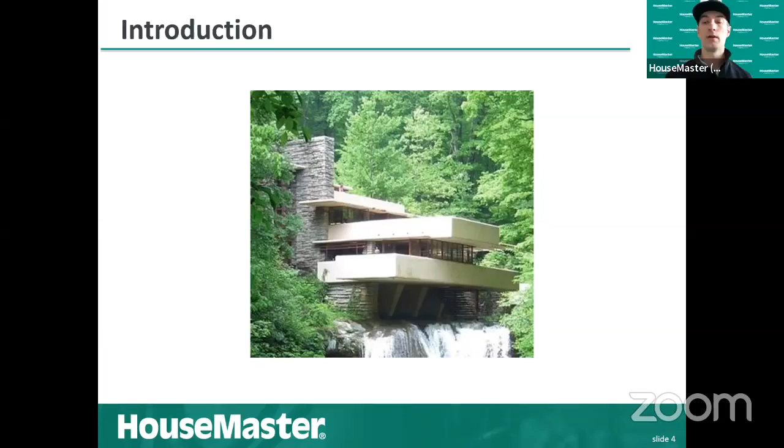So here we have maybe something more traditional that we're all seeing. This is the base of the foundation. You can see that the cracking is rather pronounced. Now, the question becomes, is this topical? Is this structural? From the outside, that looks bad. It's definitely something that is going to require additional investigation as we enter the home or walk around the rest of the outside to see how deep it is, to see if we can see through those cracks from the inside to the out. But regardless, if this is becoming structural or not, this is something that's going to have to be repaired.

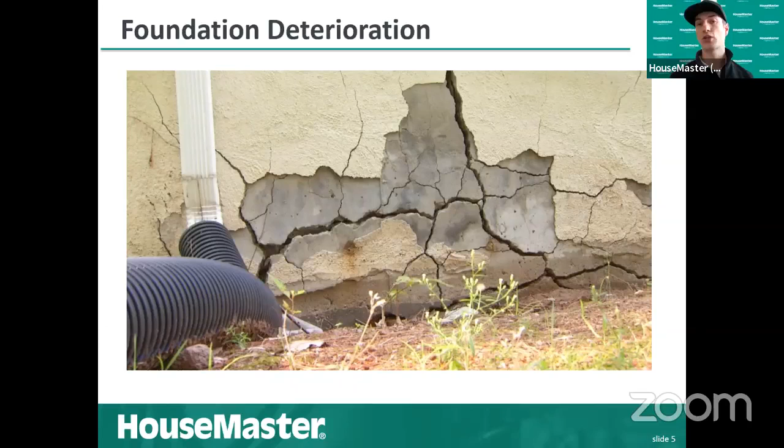The concern here is, is this affecting the structural integrity of that concrete wall? Now, on the flip side, this is something more common, something you'll see more frequently. You'll see that topical flaking of the foundation coating on the concrete foundation wall, or maybe even the block wall, depending on what you have.

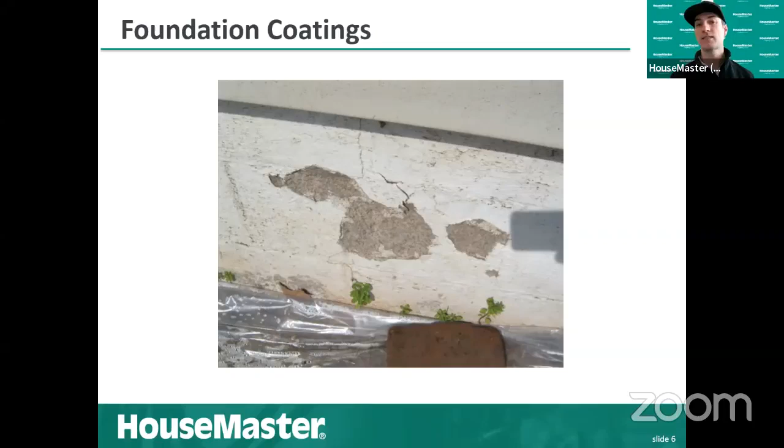Now, this is nothing to worry about, or only slightly some concern there. That flaking parging that's on the front of that wall does have some protection from water ingress, and replacing that foundation coating is a good idea. But at this level, when it's that kind of flaking, that's not something to be concerned about from a structural point of view.

Here we have a vertical crack. There's a few things we look at when we're looking at a crack. Is it vertical? Is it horizontal? Is it diagonal? How big is the crack? And is there movement? Is it just separating straight across, or does it have some kind of rotation or a lip on it? This is a rather large crack. I think it's probably anywhere from a 1/4 inch to a 1/2 inch, probably more than a 1/4 inch.

Cracks at the corner are common because that's often where there's a downspout or where water collects, and that can lead to differential settlement of the foundation leading to that crack. It is definitely something we're going to want to look at a little closer, and you're going to want to correct the grading at a minimum to make sure that it doesn't continue. First and foremost, this could produce water ingress on the interior of the home. It could also lead to further cracking.

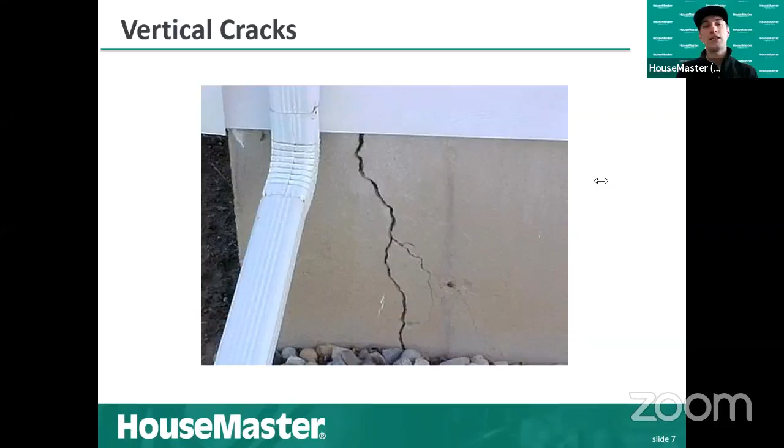It looks like there's probably some kind of aluminum, wood or vinyl siding above it, but it could lead to cracking in a brick facade wall. And if water continued to collect in that corner, maybe that downspout had been disconnected, maybe the grounds are naturally funneling water towards that corner, it could lead to continued settlement. In other words, continued sinking of that footing that could lead to structural issues.

So here we come inside to the foundation, and we see another crack. This one's diagonal. It's smaller, but you can see that this is leading to water ingress in the home. If you can't see actual water coming in, you can definitely see the remains of what the water brought with it. In other words, dirt.

This particular one was sealed, and we do look to see how it was sealed while we're there. While we can't always confirm the methods that were used, we look for certain styles of filling the crack. Is it done with just caulking? Is it done with injection crack fill? Nothing is 100% guaranteed, but there are certain methods that are better than others. But at a minimum, if this wasn't filled, you would want to make sure that it was, to make sure that you keep the water out of your basement.

The other issues are, if there is water coming in, that water can push against the wall, and particularly in a cold climate like Canada, that water that's behind the wall in the earth can freeze and expand, and that can push the wall. So again, a lot of these things are showing their symptoms in the foundation wall; that's what the cracks are. They're like a symptom of a larger problem. We want to take care of that larger problem. We want to get that water to be flowing out into the yard, not towards the foundation.

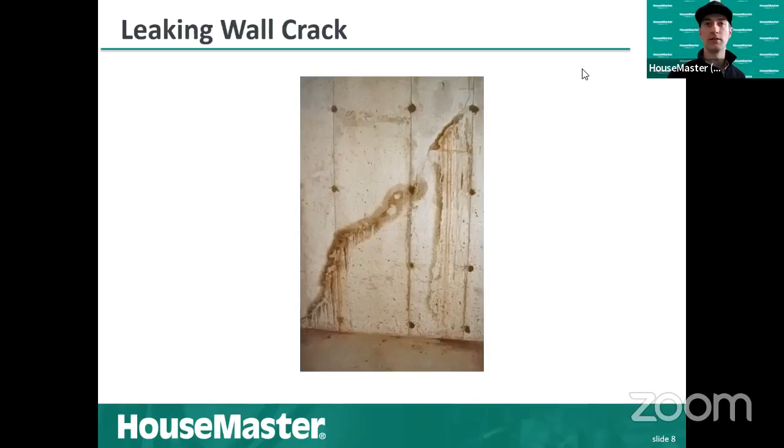So here we have some cracking in some block work. This is something that I would refer to a foundation specialist and possibly even an engineer. And the reason I say that is, while it is common, there's a couple of things that are going on. Not only do you see the cracking, which is an indication of differential settlement. In other words, one area sunk or raised at a different level than the other part, but you can see there's a little lip on it. And that means that part of the foundation has pushed in, where the other part of the foundation has not. It has stayed in place.

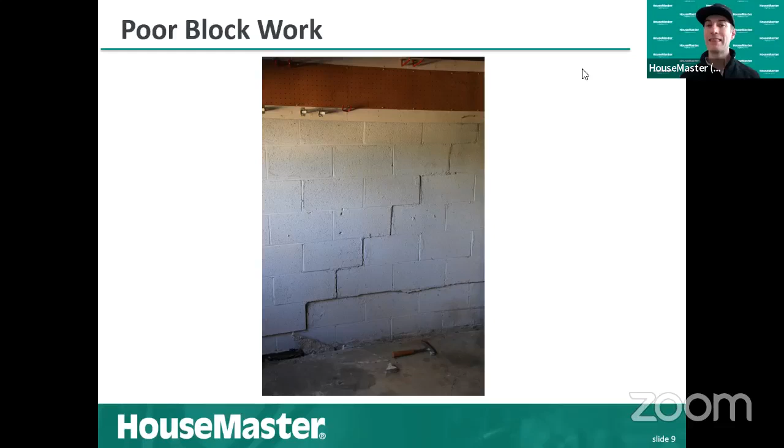That kind of difference is a larger issue than just normal, say, shrinkage cracking as concrete cures. This means that there is foundation movement. This means that the soil on the outside, or possibly heaving from frozen ice, is pushing that wall. And that's something that is structural in nature and could impact the rest of the overall structure. In this case, it seems very much in line with either hydrostatic water-based movement or ice, because you can kind of see there at the bottom that part of the bottom has moved and the other has not. And that is more of an indication of where the frost line is.

So here is a horizontal crack. When you have excessive lateral pressure, in other words, excessive sideways movement, it will result in a horizontal crack. Horizontal cracks are known to be the more concerning of cracks that we find in foundations, because it is an indication of foundation movement, usually from soil pressures or hydrostatic pressure. When I say hydrostatic, I mean water pressure.

It is structural in nature, and the foundation is what is holding up the structure above. So the wood framing that is above the basement that holds up the walls and the floors and the roof of your home is resting on the foundation. If that foundation gets pushed so much and it buckles and falls and collapses, that is going to impact the rest of the home. And so this is something that is serious. It's something that needs to get taken care of. This is definitely something that needs to be looked at by an engineer.

There are ways of correcting this. You want to start on the outside with whatever is forcing this to happen. Usually grading, downspouts, maybe there's a hill, something is forcing water or some other thing to push on that and create that issue. And then it's maybe not necessarily rebuilding the wall, but there's different methods, different materials.

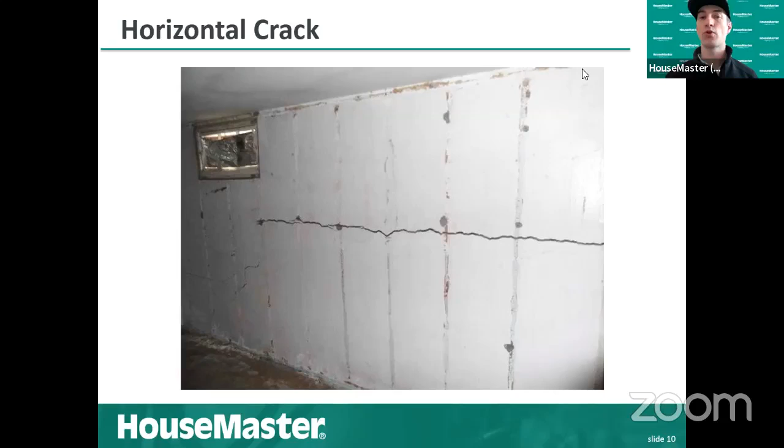You could put in pilasters. You could put in certain, almost like strapping, and they put posts out underground, and then they screw it back to kind of jack the wall back up into level position. And also those stay there permanently so that wall doesn't push anymore. But given enough pressure, that wall is going to move. So it's always the first order of business to take care of what pressure is being put on that wall.

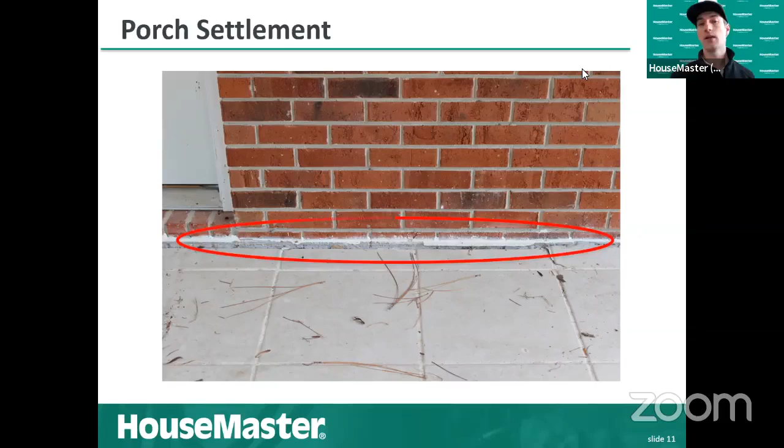So these things are small. Landscaping is always more expensive than you want it to be, but for a few $1,000s, maybe $5,000, you could save yourself $25,000, $35,000, $50,000 in extreme structural issues. So take care of the outside of the house so it doesn't lead to these larger structural issues with your home. Okay, and I think you all saw it, but that's what I was talking about.

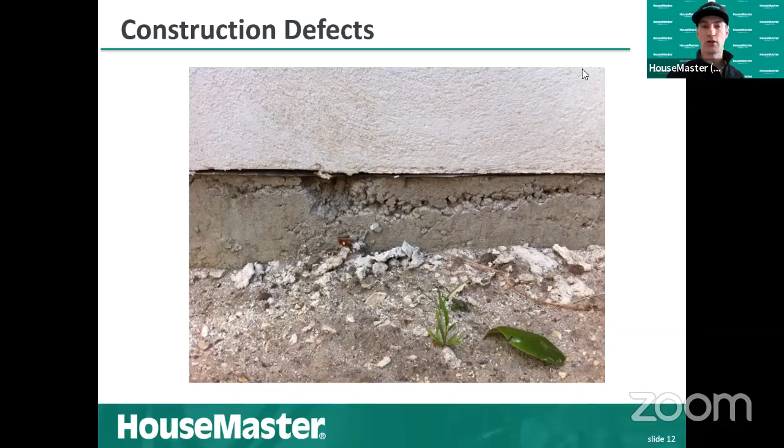So here we're seeing some cracking again, and we're seeing some intense settlement, okay? So before we had seen some more minor settlement where it was maybe a couple of inches. This is like a good 8 inches of settlement, and that has settled, and they've just continued to pave over it and not dealt with whatever issue is going on.

I can't tell you exactly why this settlement was occurring. If the backfill was incredibly soft, if the soil conditions were just softer than normal, different soils have different consistencies. Sometimes there might be other issues. A home might have been constructed near a river's stream bed that continues to have soft soils that continue to flow. But you can also see there's this horizontal settlement. There's something at play here that is a larger issue that needs to be investigated and corrected.

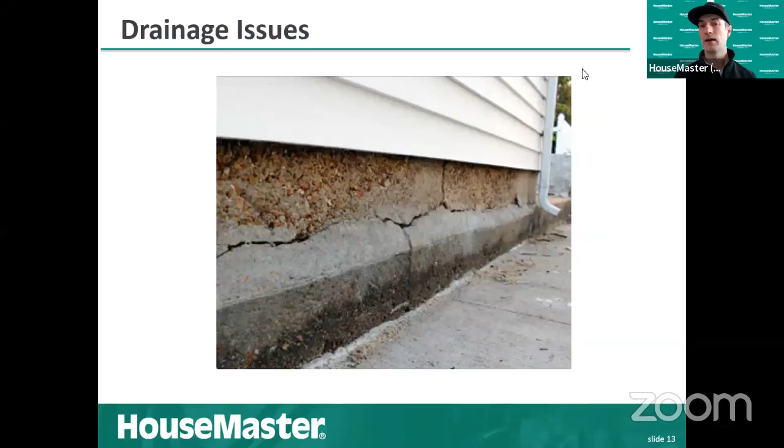But suffice it to say, this is something that is going to require additional investigation, oftentimes by a foundation specialist or an engineer to correct this. So it seems like a rather minor thing, and it is a minor thing. This is something you can go to Home Depot.

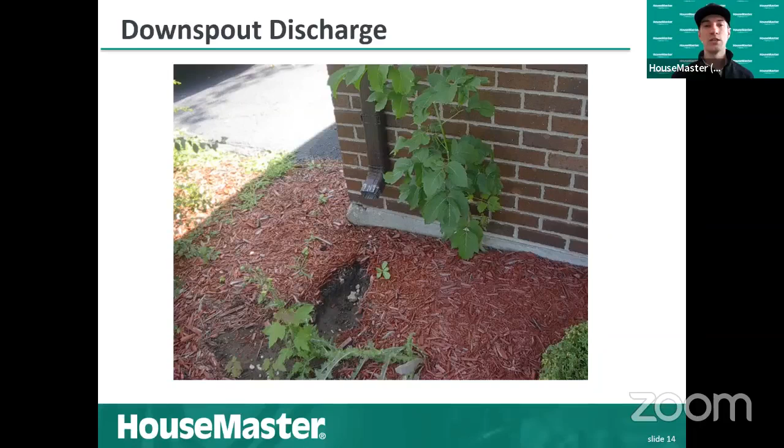So this is something that's a very, very inexpensive fix, but it is one of the primary factors that leads to corner settlement and foundation settlement in general, is poorly directed downspouts or downspouts that are terminating right at the foundation. And that could very likely lead to something like this.

Now you can see that this crack, larger at the top, smaller at the bottom, that's classic differential settlement. In other words, one side, let's look here, the right-hand side is settling or sinking more than the left-hand side. And that is forcing that corner to go down. As we go to the left, where that crack is smaller, that is not sinking as much.

So the crack at the bottom is smaller, the crack at the top is widening as that pulls away from the other part of the wall at that kind of point where the lower part is. So that leads to the stair step cracking, that leads to the larger at the top, smaller at the bottom crack. This is something that could occur from that picture that I just showed you. Okay, this could also happen due to the grading. In other words, the grounds directing water to a corner or side of the house like this.

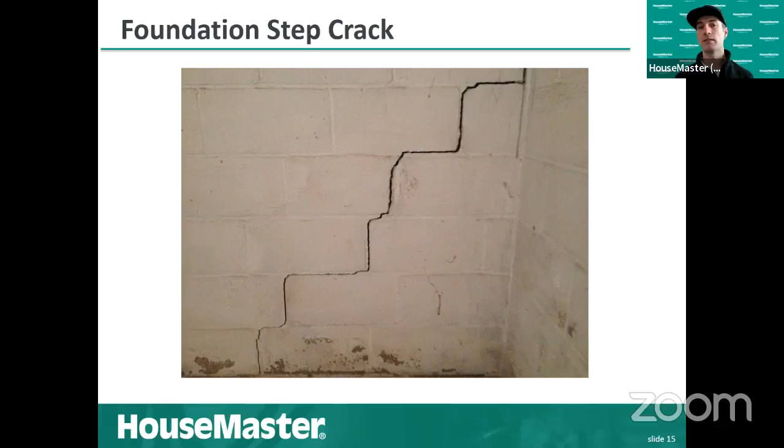And when you have a crack that large at the top, you're looking at more than 1/4 inch of a crack. It's very easy for water to get in. It's very easy for drafts or even bugs or vermin to get in. So this is something that you want to correct, not only so it doesn't lead to structural issues, but so it doesn't lead to other things.

I was just speaking about the grounds. The grading or the grounds around the property are a huge way to keep water away from your home. You can see here that this grading is not good. It is not good at all. While as you look at the back of the property, you can see the fence slowly slopes away from the home. You can see that the backyard is sloping away from that back wall where the chimney and those various vent pipes for your HVAC equipment are located.

You can see the grade, like a nice gentle slope away from the house. However, right at the edge of the house, you can see that it's all back sloped towards the home. Now, it does look like the grass is in. It's been in for a while. It's not fresh sod. It's been mowed at least once. It appears to have taken root. They did not do this grading properly. So that is basically a funnel into your basement.

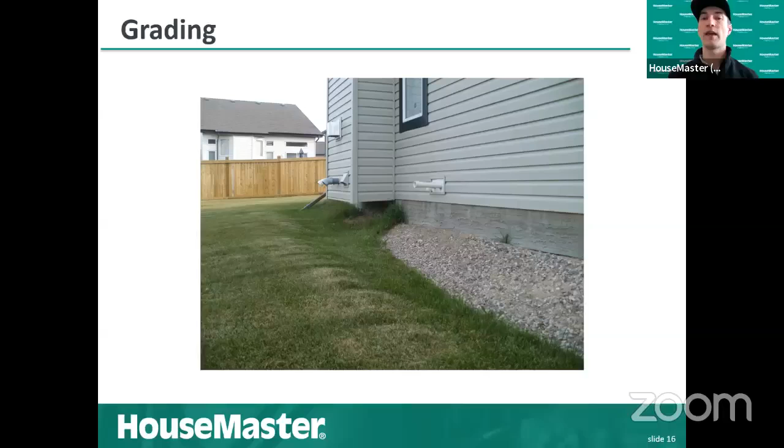You can see at the top left where there's a downspout coming off the roof. All of that water that collects could just funnel right into that area, and it has nowhere to go but into your basement. If that isn't going to lead to structural issues, it can lead to water issues in your basement. And nobody likes their carpet to be damaged. Nobody likes their storage or their office or their bedroom to be damaged or have mold in it. So these are all things that could happen when water gets in your basement, and it's because of that poor grading. This is what could happen.

Different home. This is an older home. You can tell because it has a block wall rather than concrete.

But here's water coming in, and that black stuff, that is likely mold. Okay, so this is obviously water ingress. Mold does not consume rock or inorganic material like concrete or block walls, but it will eat organic material. And sometimes that is dust on those walls. Sometimes it's dirt or other organic material that is on the walls. Sometimes it is certain types of paint. So if you do see mold on a wall and you're wondering why that is, you wouldn't think there would be a food source on a concrete or block. That is the reason.

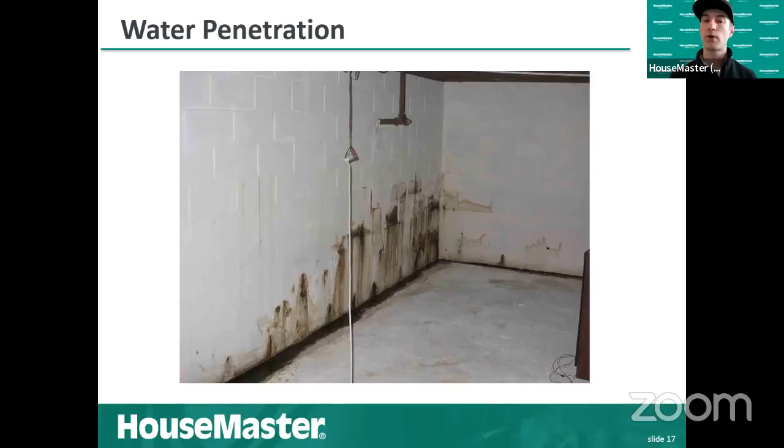And the other issue here is not only do you want to keep water out of your basement, but this is an indication of a bigger problem to come. As I mentioned, if you have water pressure behind that wall, that could lead to problems, structural problems. So you want to take care of that.

Keeping water out of your basement is about mitigating these problems. Some of the things I talked about: adjusting the grading, making sure there's a slope away from your property, making sure you have downspouts that are correctly lengthened so that they direct the water 4 to 6 feet or more away from your foundation, particularly if you're in downtown Toronto and you have very close homes. You want them to go even further away, and you don't want to screw up your neighbor. But particularly brick and stone foundations, you're going to find them to be more seepy than a concrete foundation.

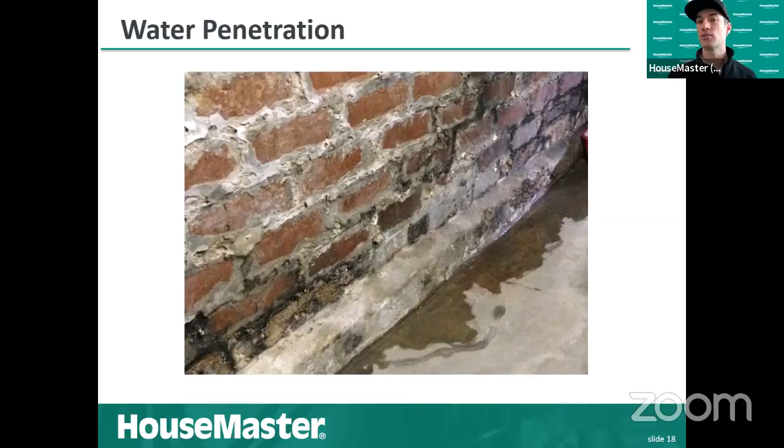Now, here's a basement with mold. Here's a pretty extreme case of mold. You can see it throughout the wall. As a home inspector, when we find mold like this, it's pretty certain that that's mold. But we have to talk in language for legal reasons, and we would refer to this as suspect mold until it is verified by a lab. But make no mistake, this is a concern. This is very likely mold and possibly multiple types of mold. You would probably want to have this tested to verify what types are present to know what kind of harm was caused.

Mold needs three things to grow. And two of those things we have in every single house. It's a temperature above 40 degrees Fahrenheit for most molds. And it is a food source, in other words, organic material like paper, wood, cloth, some of the other things that I discussed earlier. And then the last thing it needs is water. So if it has these other things, if you introduce water, mold will grow, okay? And if it is allowed to grow uncontrollably, you will grow full colonies like we're seeing here.

This is a health concern, or at least a potential health concern, because with any molds in this quantity, there's likely going to be mold spores in the air that are in excess of what you should have in your breathing environment. Again, you don't know that until you do a mold test, an air sample test, to verify.

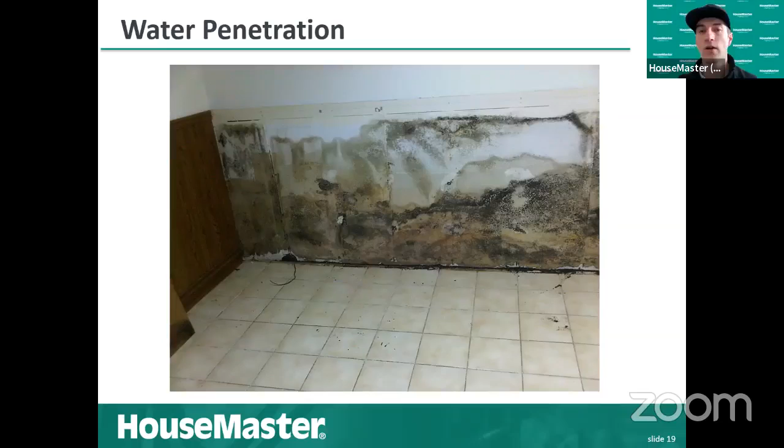By the way, at this size, even if you were a healthy person, this is not something you would want to tackle on your own. This is something to call the professionals on.

And as the water in the ground around your house, the groundwater, meets the foundation wall, it will oftentimes meet a dimple board or some other kind. Sometimes it's just a bitumen wall or some other kind of skinned wall, and that won't allow it to go into the foundation wall itself. But what the dimple board does especially is there's a bit of an air gap, and it allows the water to trickle down on the outside of that wall and have some place to go. And that place that it goes is that tube, that weeping tile.

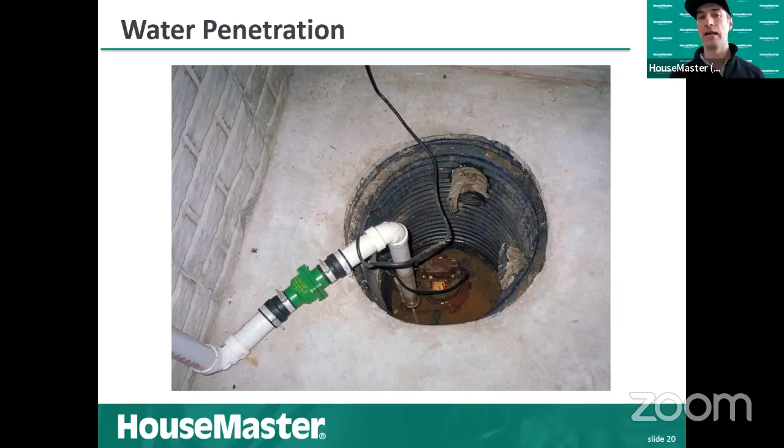That moist air will lead to high humidity in those areas, particularly in a crawl space that's already naturally humid. And that will lead to mold development, and that can lead to wood rot, either through the mold or just through high levels of humidity. And if there is wood rot in your floor structure, that is going to be a structural problem. Crawl spaces, particularly in and around Toronto, are almost never done right.

And they oftentimes do have structural issues. And I have seen just horror shows. I posted just the other day, there was a colleague of mine, he had part of the beam held up by a water tank. They just took their old water heater and started using it as a support post in the basement or in the crawl space because the floor was sagging.

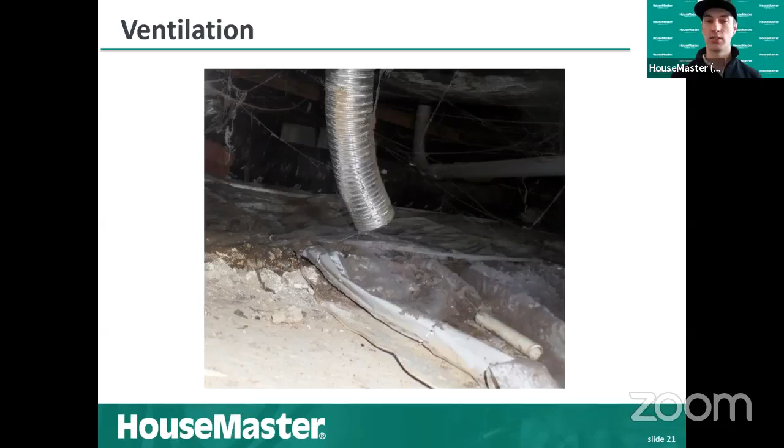You can also see another vent line, probably for a furnace or something in the back. It's probably ductwork. That should also be insulated, and that is so it doesn't develop condensation. Condensation will also lead to moisture development, which could lead to mold and could lead to high humidity in the basement. So all of those things you need to consider when you're running vent lines for baths, kitchens, and laundry rooms.

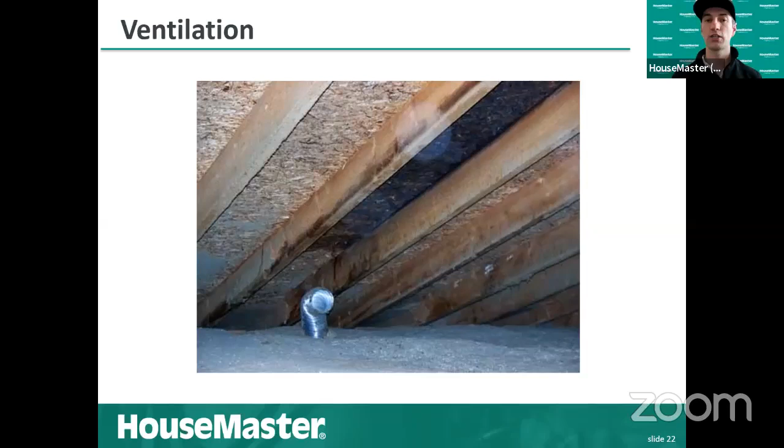So all of these things are things that you want to make sure are done properly. And these are all things we look for with our home inspection when we're looking in those various spaces, crawl space and attics.

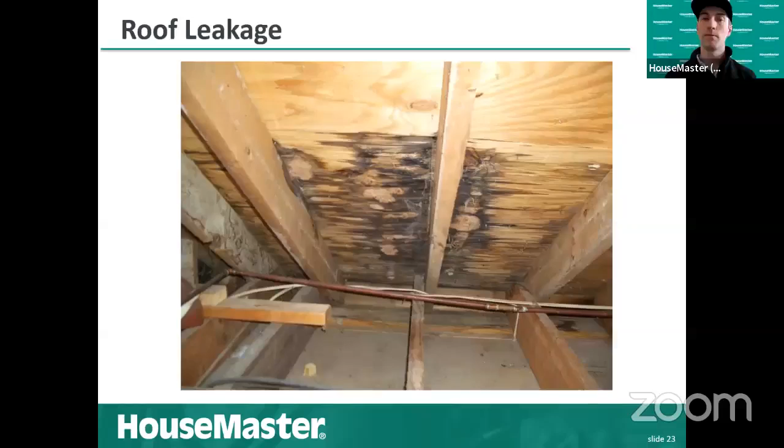You can see there's some water stained or mold stained rafters or trusses. I guess it looks like it's more rafters here. But that could lead to deterioration of those structural members, and that could lead to sagging of your roof. So these are things you want to take care of promptly to make sure that they don't lead to issues.

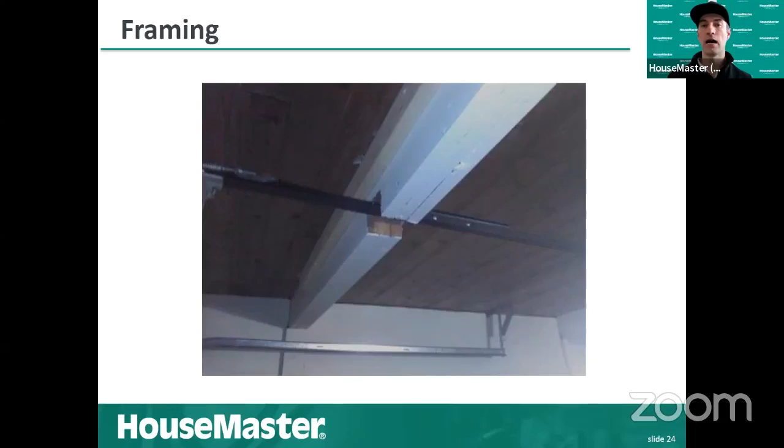Sometimes you'd be surprised with the electrician that overly notches things, or the plumber especially overly notches joists, beams in order to accommodate that plumbing or that toilet. So they just cut right through structural members, not taking into consideration the effects on structure that might have. And this is something that could happen. This could lead to that floor sagging so much.

I just did some structural issues in my house. I live in a 130-year-old home in downtown Toronto. I have a staircase that was installed 130 years ago in a way that we would not do it these days. And while it was maybe acceptable at the time, it didn't have the proper strength below it. It didn't have the proper support. And so over the past 130 years, it has sunk.

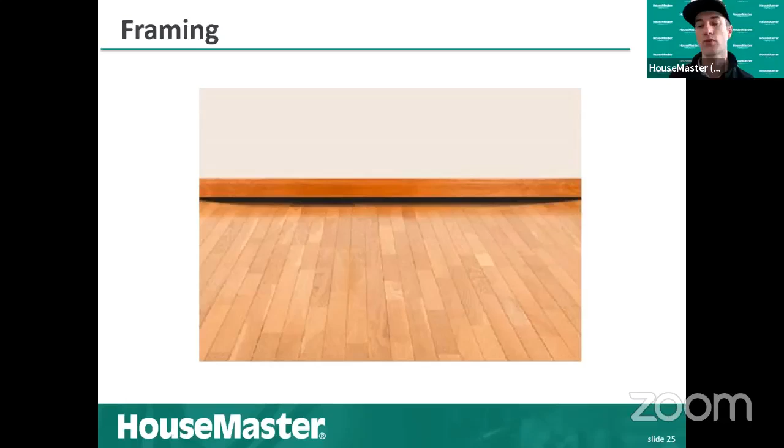So here we are back in a crawl space, looking at framing. The framing above, as I was mentioning with this staircase that I just had rebuilt, needs to be supported underneath. The joists and the beams need to be supported either on the foundation walls, or if they stretch too far, they need to be supported by a post or a pier or a column. Those are all various names for the same thing, something that supports it from underneath.

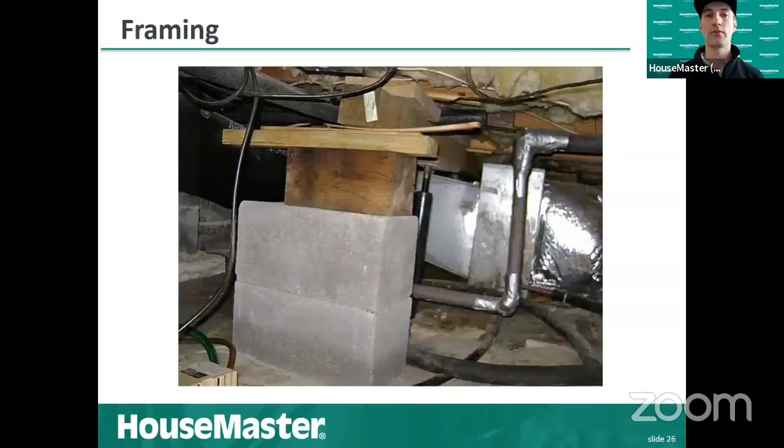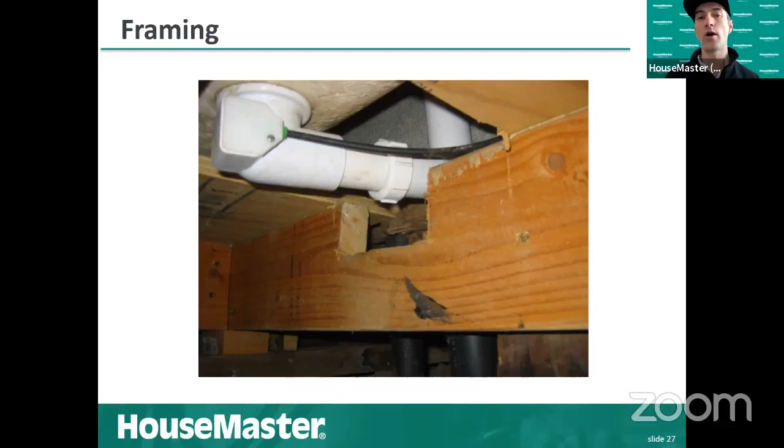Here's what I was talking about with the plumber. So again, overly notched framing members. You might want that bathtub there. You might want that toilet there. But your plumber will either have to get creative, or you might have to make compromises on your bathroom design in order to accommodate the various plumbing fixtures. Do not cut through structural members like this. That is going to, at a minimum, have to be re-supported, or now you have to redo the tub and you have to redo the joist.

But that's why we have to kind of put two and two together. If we feel the floor is soft, if we see the floor is sagging, you do want to err on the side of caution, maybe consider the worst, and have a look, because this is a situation where it's not going to give you any warning. You might just put your foot through the floor at some point.

I don't know if any of you guys listen to As It Happens, but about 6 months ago, there was a really great story on As It Happens. There was a family out in New Brunswick or maybe Newfoundland or Nova Scotia. It was out east. And this guy was walking through his bedroom and just went right through the floor. The house had been built on top of a well. And they were probably using this well to serve the water needs of this home.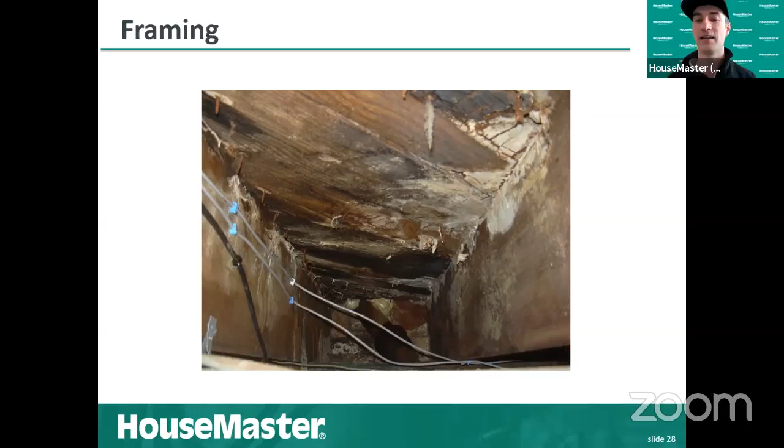But at one point they got plumbing and they decided to just seal over it. Well, they didn't properly seal this well. And for like 50, 60, 70 years, this moist water from this well was just permeating and rotting this wood until this gentleman walked right through the floor and went over his head in water and had to be rescued. Really interesting story to look up if you're at all interested.

So in addition to being properly supported, we want to make sure that what our floors are supported with are doing their job. While screw jacks are allowed in residential construction permanently, so these things can be screwed in place and they do not need to be replaced with a fully fitted, custom built post, they should not be buckling. Something has happened. Either during installation they overly screwed this thing until they damaged it, and when it's damaged, it's compromised and it won't perform the way it should.

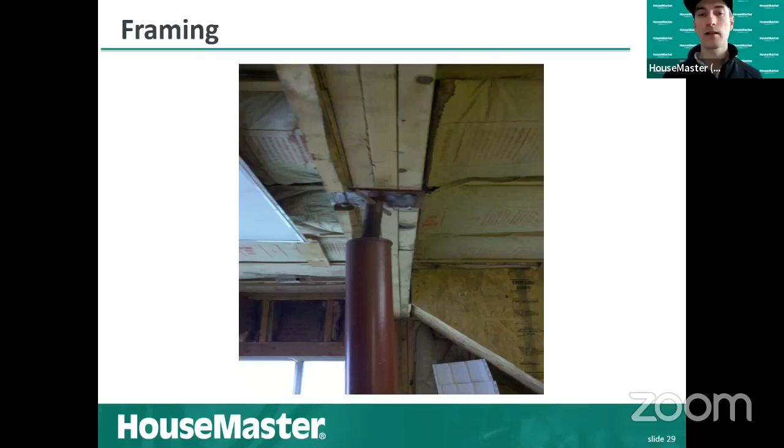Or the home has had some other significant kind of movement, either with extreme loads from the top that have been pushed down on this to buckle that column, or conversely, extreme forces from beneath, some kind of heaving, maybe due to soil pressures or water or something else. That would be extremely unique. But clearly this post is compromised and should be replaced with something that is going to do the job.

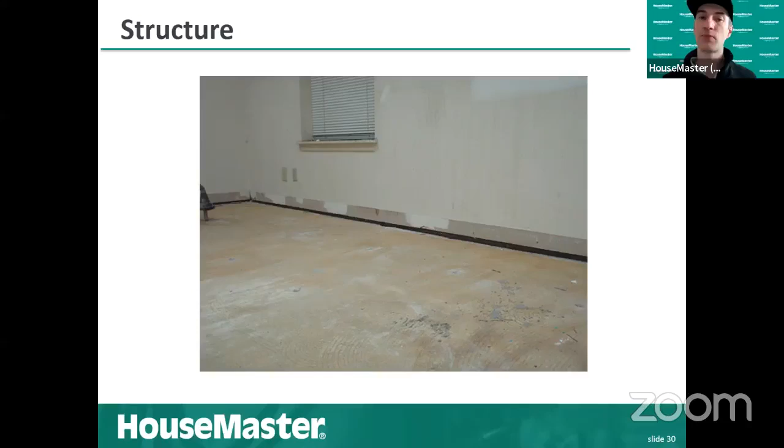Again, here we're seeing some floors that have settled significantly. Usually you will see a little space between the drywall and the floor. And then when the finishes are put in place, in other words, the baseboards are put in, they hide that small gap. But when you have a couple of inches, the floors have sunk. And so this is an indication of an issue going on underneath. That's something we would want to investigate further in the basement or the crawl space.

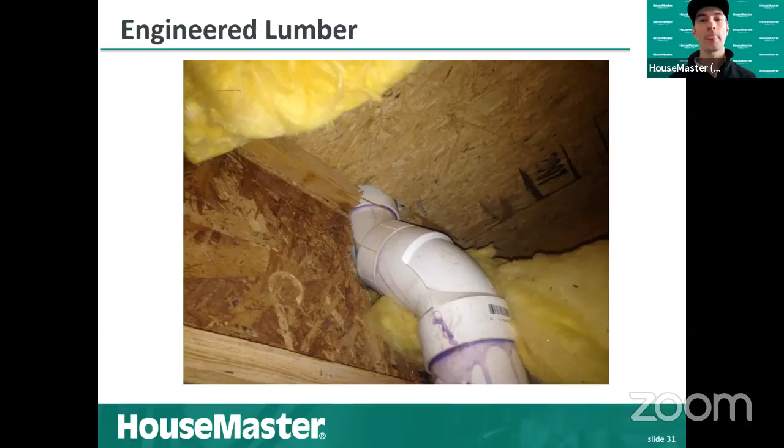Notching it in this way, where you are cutting that top member, or if the hole is larger than a certain diameter based on the requirements for the depth of that I-joist, that is not allowed. This has broken that top member, and that is going to lead to structural deficiencies with that I-joist.

So conversely, on this particular one, I'm not seeing any problems. These might be a little too close to the top, but by and large, you can drill through engineered lumber just fine. You can have multiple holes. These diameters are not too big. They may be a little too close to the top, but in fact, I actually want to see my notes.

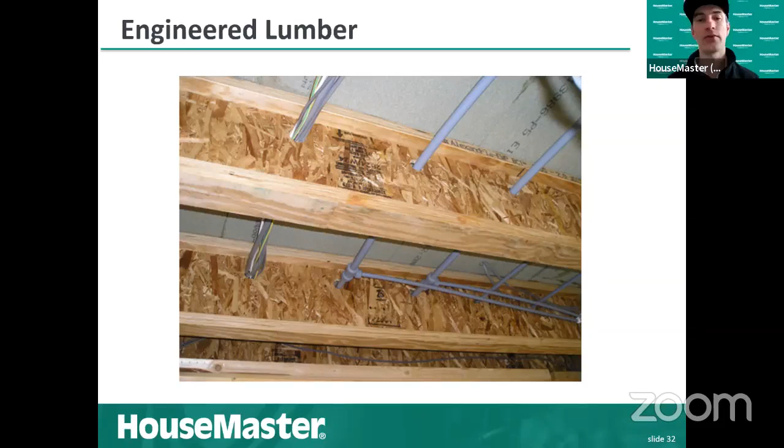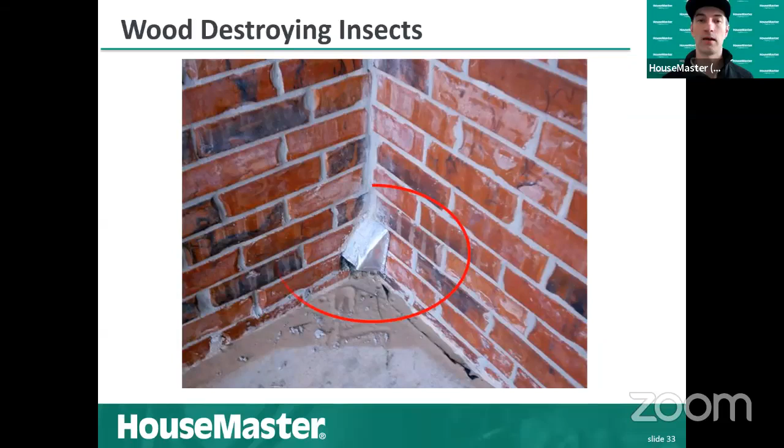They can be too small. They won't allow the moist vent air out. But also, they can be problematic for wood destroying insects. In this particular slide, while we can't see them, there were either termites or carpenter ants that were able to enter the home through this particular entry point into the home.

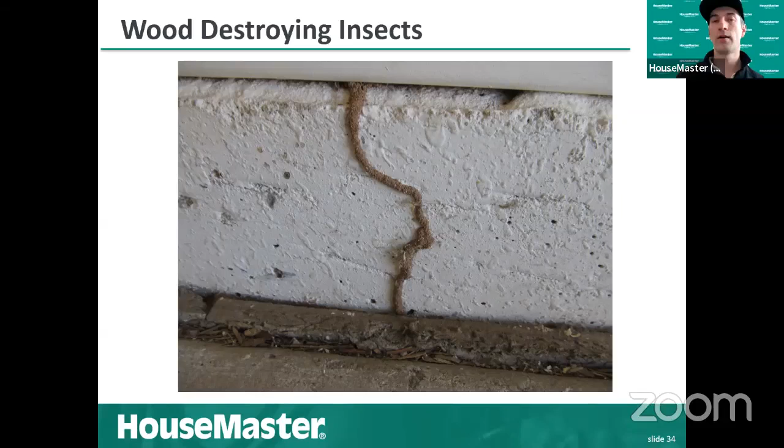Now, this is a termite tube. This is something that you might look for. So oftentimes, they look like dirt. They're the ways that termites move from one area to the other. So they're not underground, but they are concealed in an underground style environment, which is what they like to be. So looking for termite tubes is something that we do when we're in certain areas of the city that are known for termites or other wood destroying insects.

And there is some termite damage. Termites do exist in Toronto. There are certain neighborhoods and areas where they exist. I'm speaking specifically of the beaches, the upper beaches, and around the Humber River. But really, they can be almost anywhere in the city, not depending on where you live, but specifically if you're near water.

But I have found some in my neighborhood, so in other words, near Lansdowne, near Earl's Court, Earlsdale. I've found them in Little Italy. I have found them down by, say, Queen and Spadina. I attended a seminar with Aetna, who is one of the leading termite experts in town.

And they've told me that they're finding them downtown because they use these giant wood timbers to hold back soil as they're building these deep foundations for these high rises. And they do not take those out of the ground. And so those are basically just feeding frenzies for termites downtown.

And while that is not causing any structural issues with these high rises, what it does lead to is termite damage inside garages, inside storage spaces, inside lobbies of these high rises where they might eat wood finishes, wood furniture, anything from boxes, paper components that are in storage, leather furniture. I'm told sometimes termites will even eat things that are not organic. They're looking for the organic material.

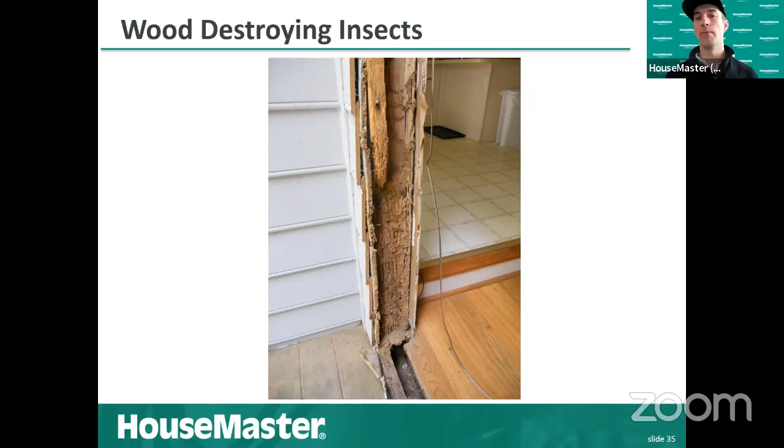If you're living in the beaches, if you're living in the upper beaches, if you're living around Humber River, you're going to make termite treatment, in other words, periodic poisoning to the area on an annual basis to mitigate these kind of issues.

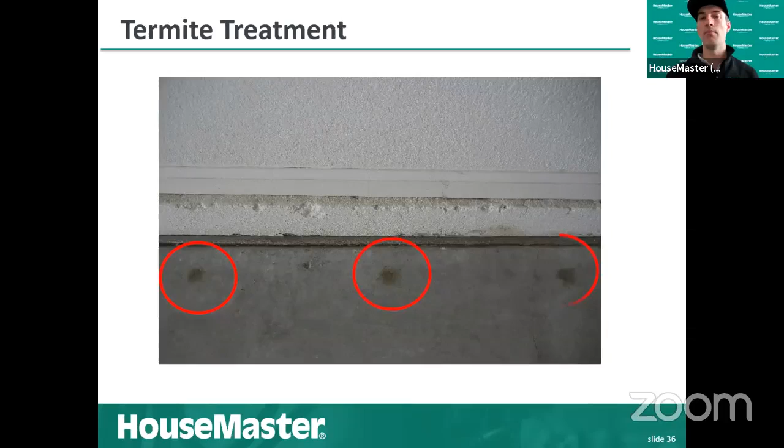But this is one indication, if we don't find termite tubes, if we don't find any termite damage, that there maybe has been some termite activity at the home, is these kind of holes. These can be confused with other concrete holes. Sometimes you see them that are basically tiebacks for the forms when you're making a concrete foundation.

The difference is the carpenter ants use these for their homes. Termites use them for food. So with carpenter ants, you'll see maybe a little bit of sawdust, but mostly it'll be clean holes. Whereas with termites, you'll see a lot of sawdust, but that's actually not sawdust, that's their poo, or frass. So if you see a lot of what looks like sawdust, that's the termite poo.

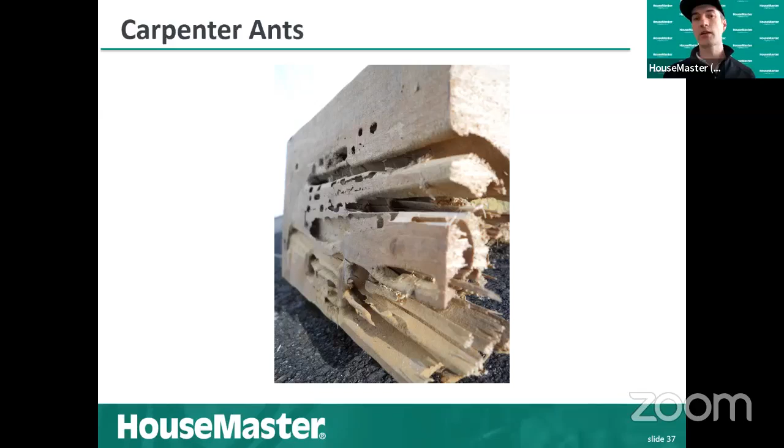But really the result is the same. The structural integrity of the wood has been compromised, and you need to take care of it. In some cases, you may need to replace structural components. In other cases, the structural integrity may still be there, but you need to take care of the termites or the carpenter ants.

And that is where I end my presentation. I really appreciate your attention, and hopefully that was informative and gave you some new information, some things that you can look out for on your own and inform clients of. But before I go, does anybody have any questions or comments?

That was really great, Michael. Thank you. Thank you. Let's see, does anybody have questions? I don't have any on Facebook yet. You gave us so much information, I don't know. Well, thanks. I sure can talk, but I like to have a conversation. So really, if there is anybody out there who has any questions, whether they're related or unrelated, maybe questions about other issues, I'm always happy to talk.

How do we know the age of windows? From Ria. Good question, Ria. Well, oftentimes you can tell the age of windows. The starting point is the age of the home. Windows, generally speaking, last maybe about 20 years, okay? So if the home is newer than 20 years and you know the age of the home, you probably know the age of the windows. Now, if it's older than that, or you think they've been replaced, or you want to know if they've been replaced, you can look at the windows themselves.